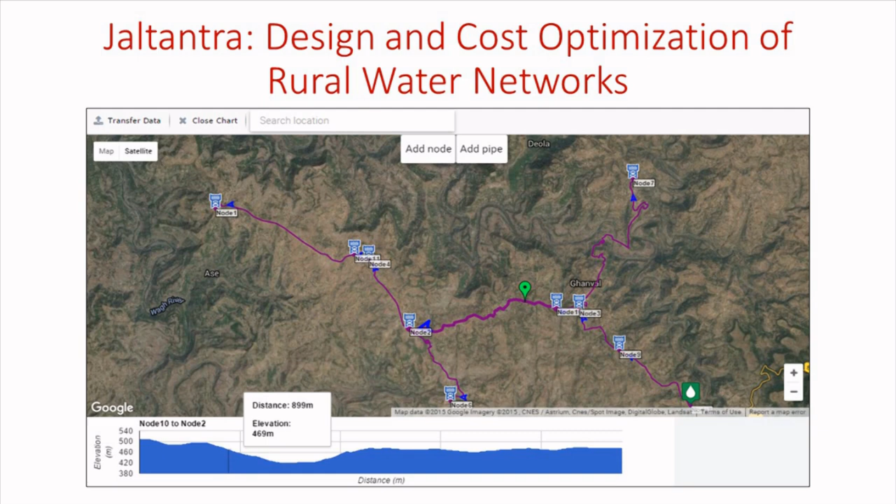The system has been optimized end to end, and also automated. These are two different things that I will talk about, so that a lot of the common errors that happen have been taken out. The important point is cost optimization, not optimization of some physical property or other. Physical properties come in the form of constraints, like the minimum head that should be provided. So it's not a research tool in that sense, but a tool to be used by engineers. We started working on this when NGO Disha Kendra approached CTARA that there's a drinking water crisis, and asked what can we do?

That's when the first TDSL project was started by Milind for this particular area, and since then we have taken a team of students and analyzed a large number of failed drinking water schemes in Thane and Raigad district.

Through that we understood this vicious cycle: once there is a technical problem in a system, the quality of service goes down. So some people stop paying, maybe people at the tail end getting bad service, and then they pull out. There's less revenue, leading to less maintenance, so further technical problems. And once some people don't pay, then others, even if they're getting good service, will not pay—they say others are not paying, why should I? So it's all the way downhill from here.

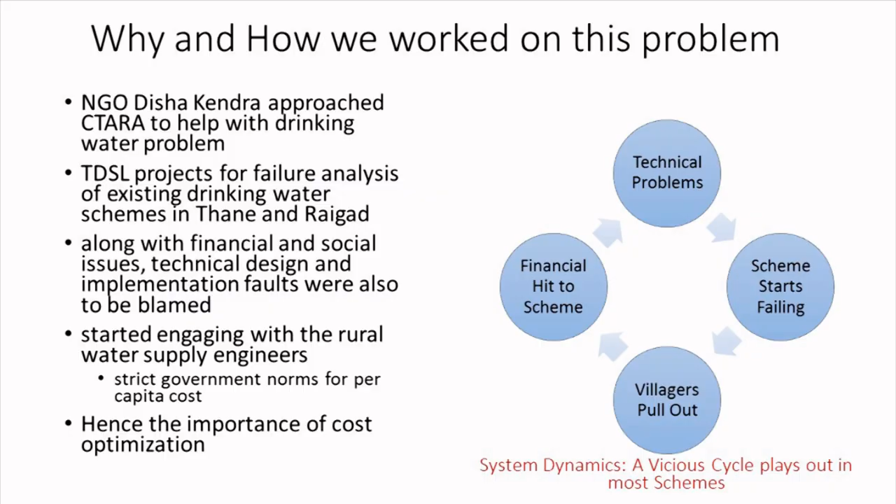So we started engaging with the rural water supply engineers, and one thing they said was there is a strict norm. Sometimes they design a scheme knowing it may have problems, but because of a strict per capita cost norm, they may cut corners to meet it, knowing well it may fail later, or not knowing, but it may lead to that failure. So the importance of cost optimization came—even 5%, 10%, whatever percent you optimize, it can make a scheme go from unviable to viable.

That's where our work started. And of course, the government has to follow a strict process, and sometimes those processes are frozen in time. But for them to adopt our system, we have to follow their process—we cannot say you are doing something wrong, at least not initially.

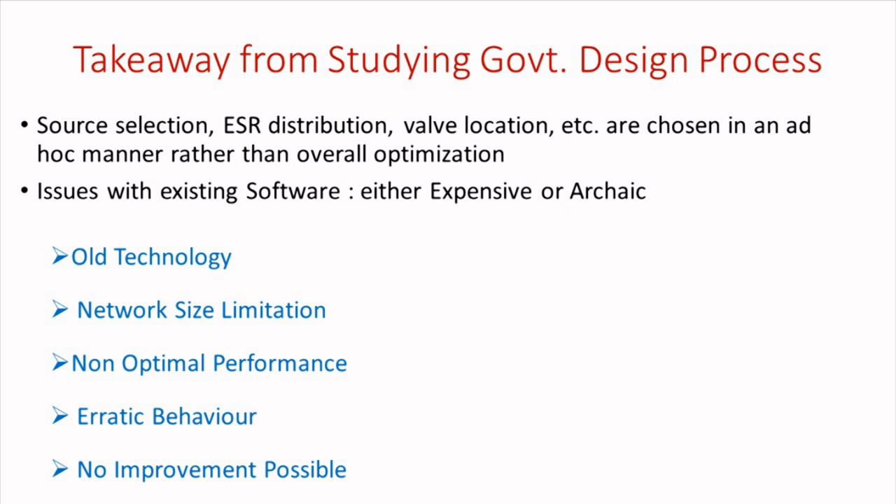So we studied the government process in great detail, understood which parts are ad hoc, and the limitations of their current design process. They were using old technology which could only work at small scale, giving non-optimal performance. So we decided we really need to build new modern software that will help both in design and optimization.

So the problem to be solved was cost optimization of a multi-village piped water scheme. There is a source in a river or a well where water is treated, then a main tank, MBR, where water is kept after treatment. From there it goes to various villages through an intermediate tank called an elevated storage reservoir, and from there to villages. This is the system we want to optimize, picking the right components.

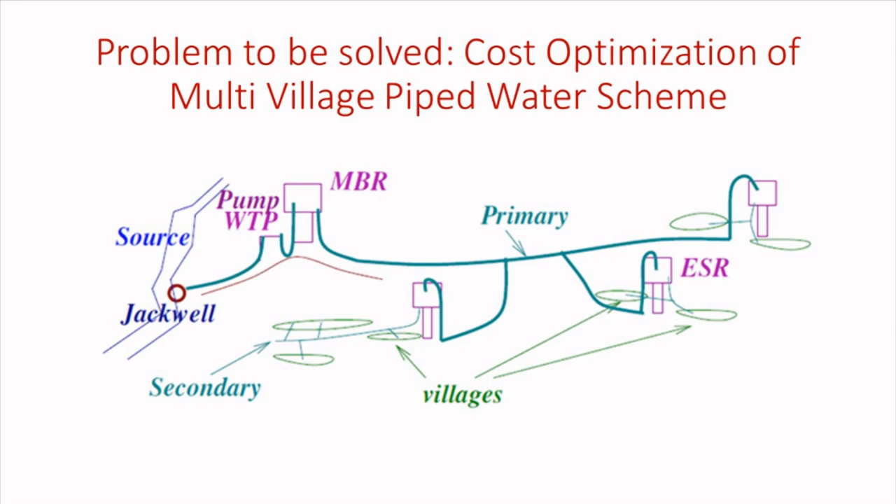So what is given to us? We assume the source is given, and that the WTP—water treatment—and MBR locations are out of scope of the JalTantra system as of now. The network layout, usually along the road, is also assumed fixed. And of course, the set of villages to be included for a particular problem—we can explore different combinations of villages.

Given this as input, there is still a lot left to optimize. The main component is pipe diameter, which constitutes about 50% of the cost—that's where traditionally they've been optimizing. Other things they have not optimized earlier, but now it's possible with JalTantra: where to locate the storage reservoir, what size it should be, which villages should connect to which reservoir—earlier done based on intuition and experience—and of course the pump size and the pump itself.

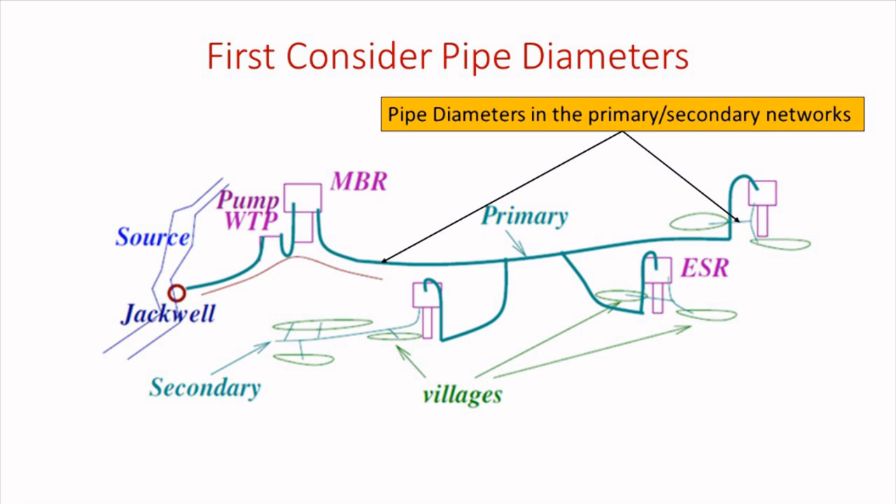So to solve this big problem, first we just focus on pipe diameter, because that was the only thing they were doing at the time—the rest of the components they were doing manually. So we said, okay, let's solve this problem.

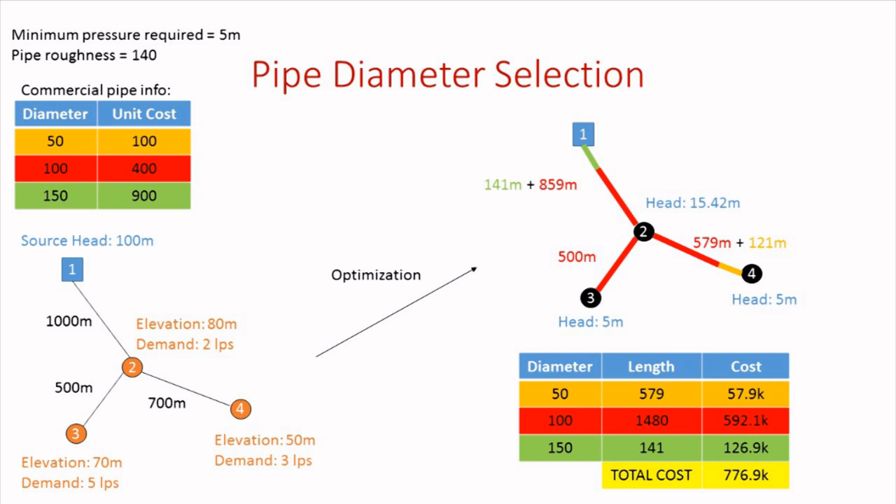The main idea here is that given a network, each link can consist of multiple pipe diameters. So you have optimization choices where each diameter's cost is known, and there's a minimum pressure required at each point. In general, a link can have multiple pipe diameters, and so through optimization you get an optimal cost.

Just a brief history: this has been studied over 30, 40 years, with hundreds of papers and hundreds of systems in some sense. Now, rural networks are typically branched because of sparsity—one village is far from another—whereas urban networks are looped because there is no real free space in urban networks, so every possible path you want to lay down a pipe.

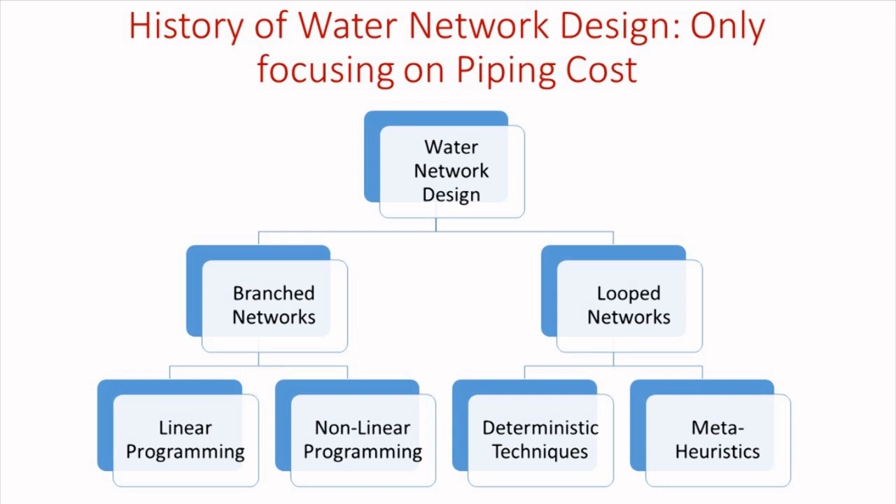So the focus of the work I present today is on branch network, but we are also working on loop network. There have been various paradigms, and because this optimal problem is essentially unsolvable even with today's resources, loop networks have been handled either with nature-inspired heuristics or other heuristics.

In all this work, the main point is that even after 30-40 years of research, they were only focused on the pipe diameter problem, and either they were heuristics for the general problem, or they assumed continuous diameter instead of discrete diameter, or they assumed that we will put only one diameter per link.

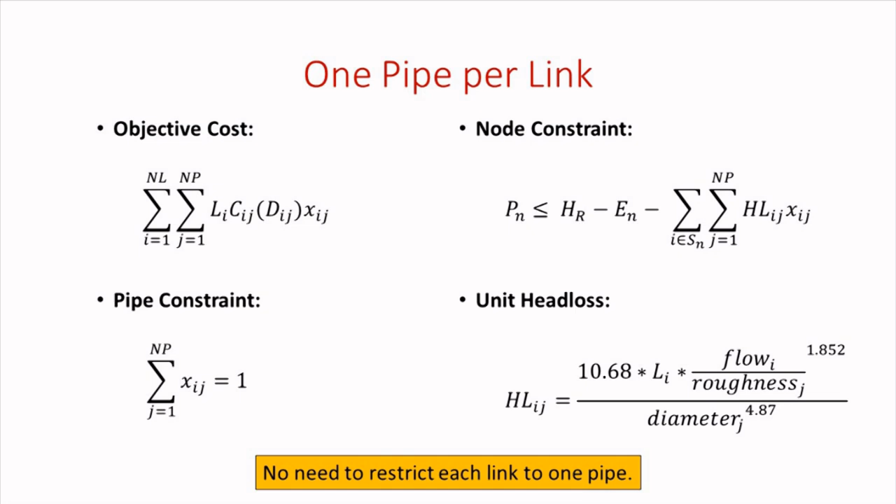There was a standard formulation being used at the time, but we realized that in practice there is no need to restrict each link to one pipe, and it's known that optimally, if the cost function is convex, there will be at most 2 pipes per link. So we modified this, but now we have an integer linear program instead of a linear program.

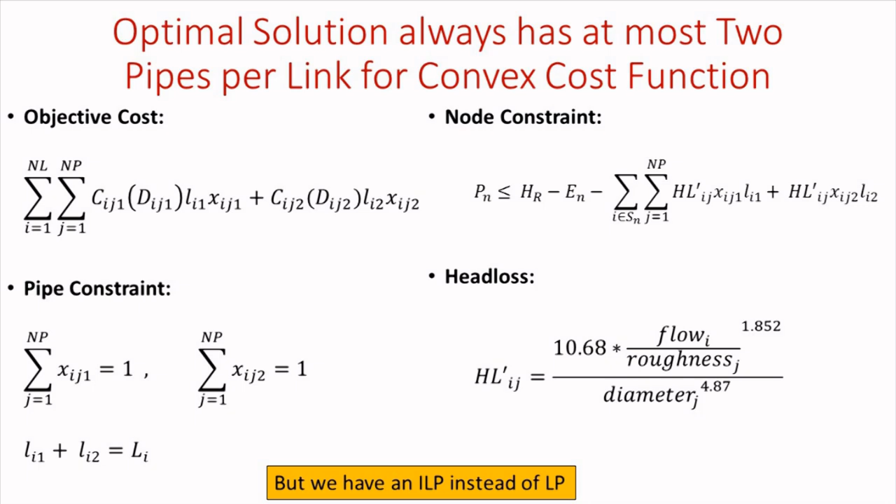So the runtime became really slow, and the system was taking just too long to run. So we thought harder, and we realized that in 30 years these LP solvers have come a long way, the CPUs are much faster, and there is a lot of memory.

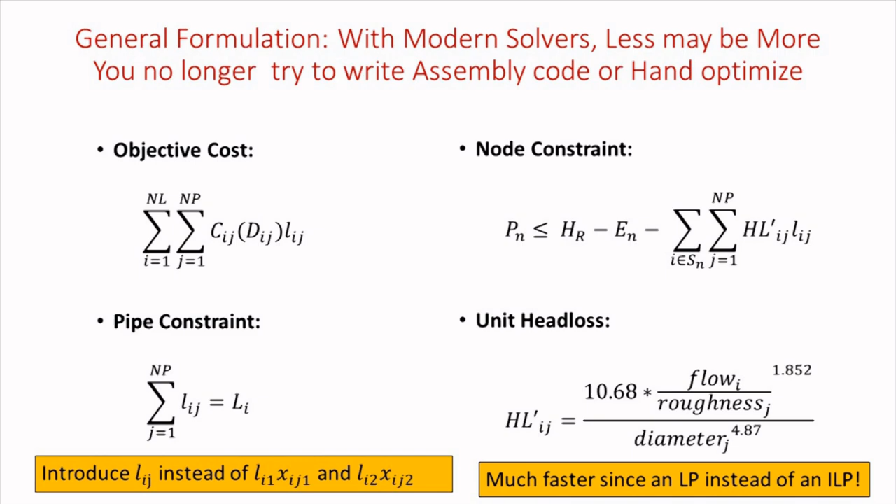Just the way you don't want to write assembly code yourself and instead let the compiler do the optimization rather than doing it yourself, similarly we said let the LP solver do the optimization that people were trying to do by hand. The important thing is to come up with a clear formulation that still makes it an LP.

So again, we iterated over various formulations and came up with something that was much faster. Anyway, these are just some details of how the earlier formulations were inefficient.

So this was the first version of JalTantra. It was a desktop system and was deployed. Engineers at Thane Water Supply started using it, and as we presented at various fora, the MJP is...

There is again rural and urban water department - MJP is the urban water department. So from Nagpur he got very interested and visited IIT just to interact with us. He came all the way from Nagpur, and then he got MJP Nagpur to start using it. They gave a lot of suggestions.

So that's the important point, that it was developed in partnership with government engineers, taking their feedback into account, because we could change the system as per their need. So they were also interested. Anyway, till now it was being used for small schemes.

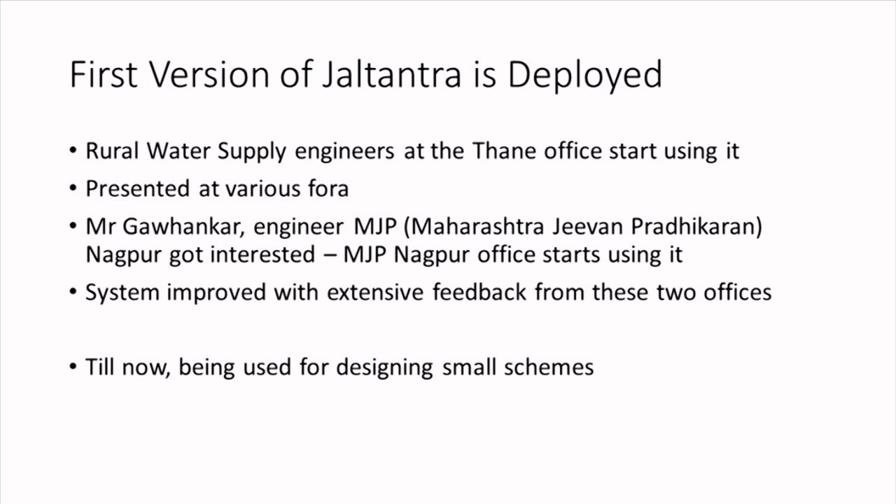When the NGO Kashtkari Sangatan approached us, there was a serious drinking water crisis in Mokhada Taluka - bulk of the Taluka was tanker-fed villages, and the government engineers said it's not really feasible to design this. This is the area from where all our drinking water comes.

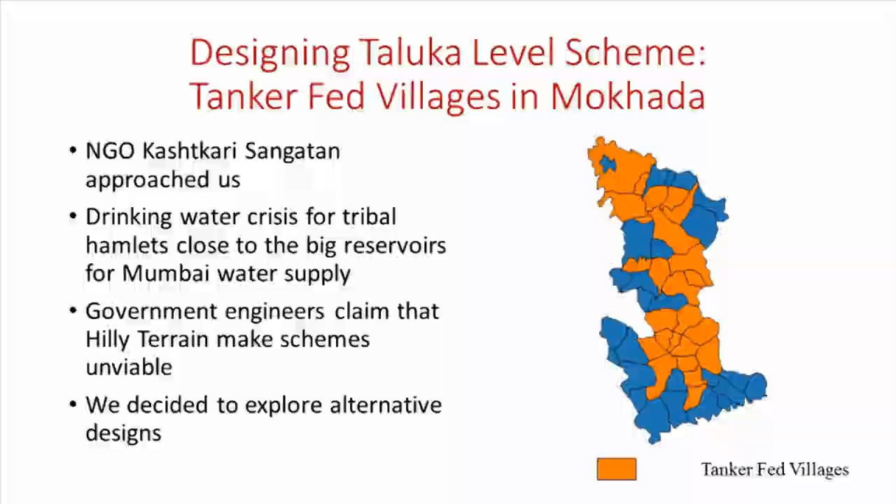So we explored some alternative designs, found that the design space indeed exists, but the main problem was that it was a very tedious task. Now in a large network, if you can decide where to put the tank, which village should be served by whom, what should be the pipe diameter - there is a huge combinatorial space explosion. There are 2 to the power m configurations possible.

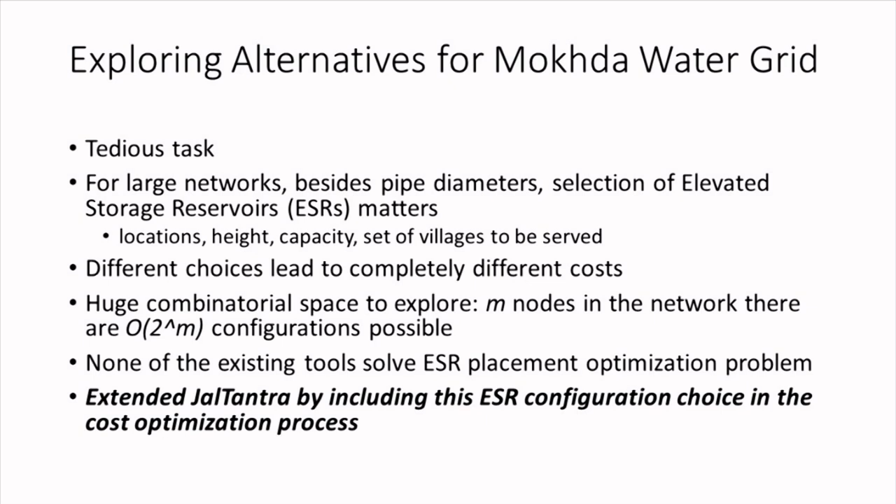We said, fine, we can't really do it manually. Of course we initially tried it manually, understood the process, because that's what the engineers were doing. Then we extended the JalTantra system with this ESR configuration choice. The main point here is that either you have a single ESR serving the whole network, or you can have multiple ESRs - in theory one at each demand node - and the optimal point will lie somewhere in between.

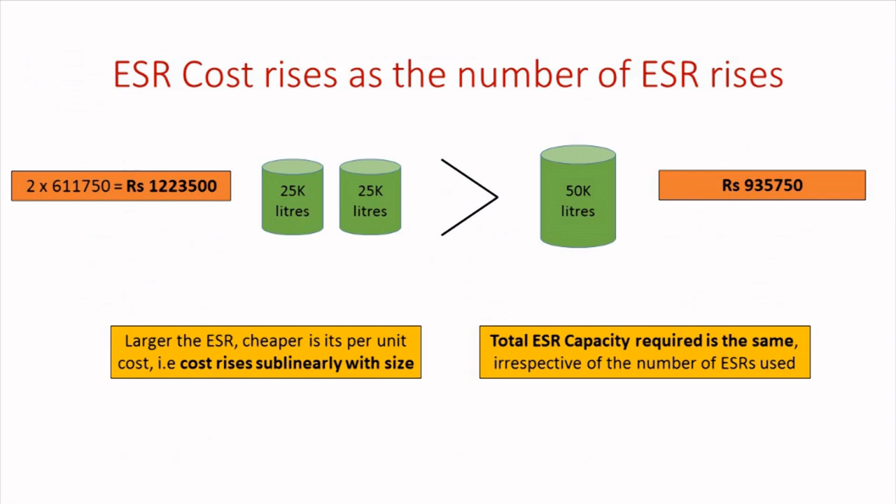So there are some details on why this optimization spectrum exists, because the pipe cost behaves one way and the tank cost behaves another way, and since they behave in 2 different ways, the optimal point will lie somewhere in between.

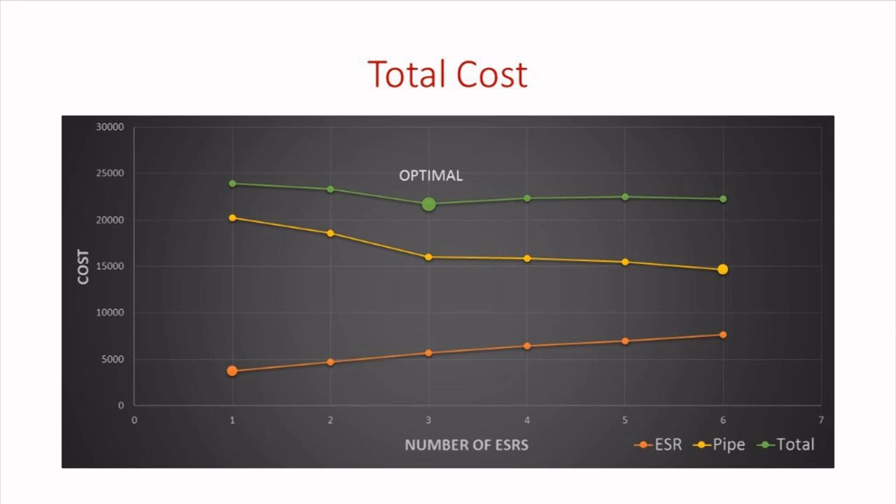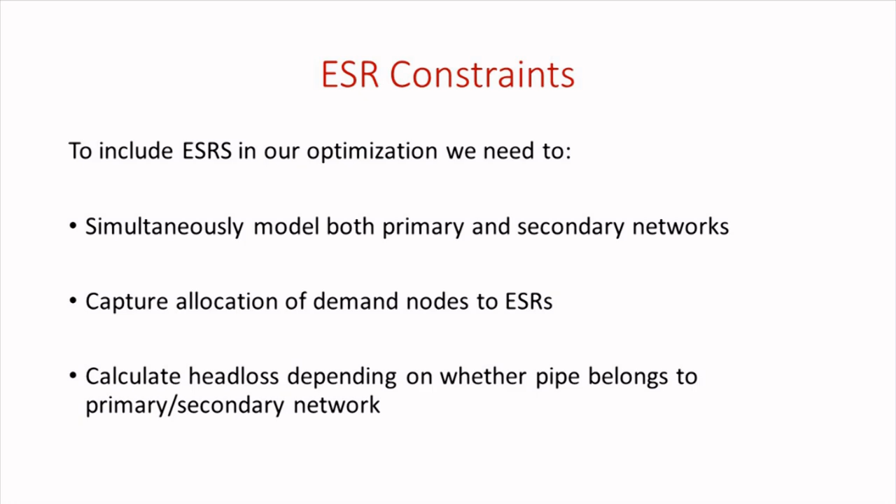So we decided to include this ESR in our optimization model. But what it really meant was now we have to optimize both primary and secondary - essentially each ESR breaks the network into 2 parts. The part from main tank to ESR is called the primary network, and the other is secondary. Till now they were optimized separately, and I guess the good reason was the combinatorial explosion.

So we simultaneously model both primary and secondary network, and these are some of the technical details of what it means. Finally, we designed one thing for the Mokhada grid with 30 villages and 13 tanks. The optimal cost comes somewhere between these 2 extremes.

Now the price for incorporating this ESR is, of course, a significant performance degradation, because again we moved back to an ILP instead of an LP. A 200-node network was now taking 24 hours, which was earlier only taking less than a second without this.

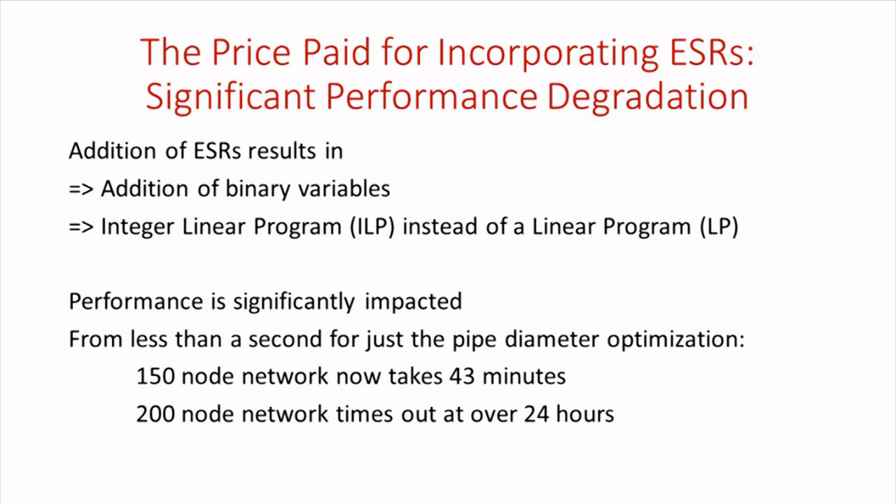So anyway, it took us a lot of time to again optimize our models. It also required interacting with engineers to understand - but it's not just mathematical optimization, it's saying physically what it means. Can I represent it like this?

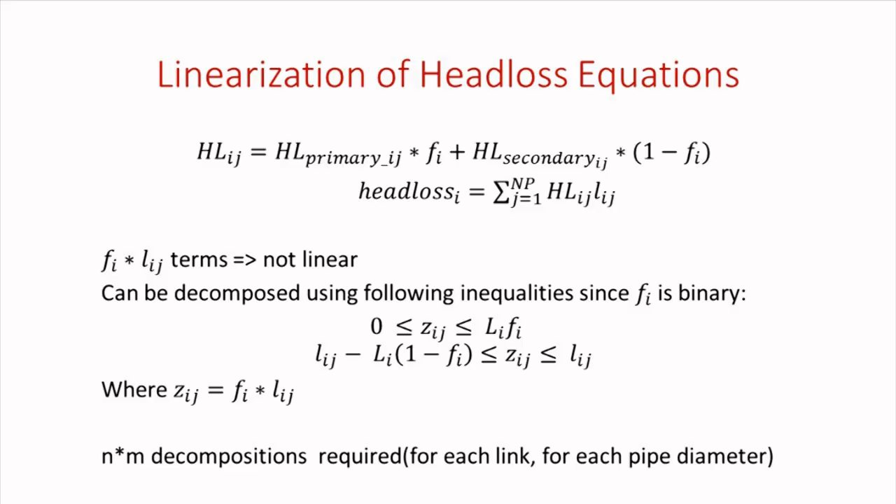Can this node really be served by that ESR or not? So that kind of interaction was needed, and then that translated into mathematical optimization.

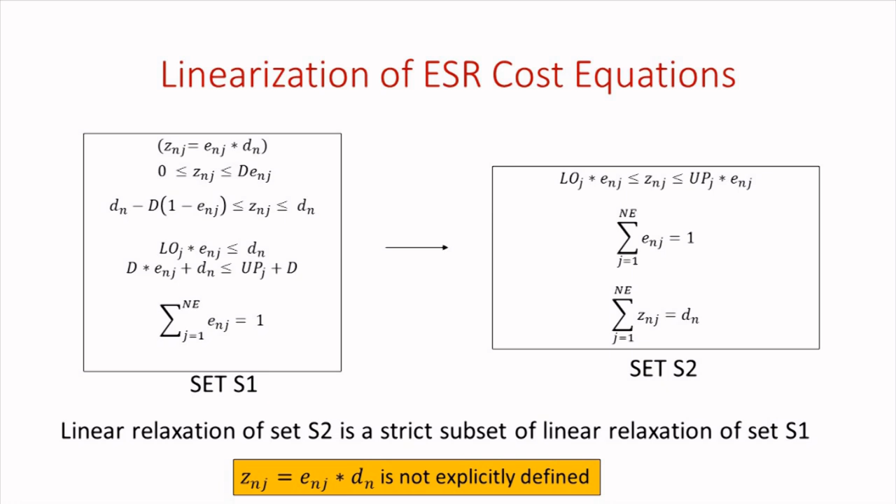A whole bunch of improvements were done, and of course we showed that mathematically they are optimal. When I change a set of equations, the linear relaxation of this is indeed a subset of this, so this is a strict improvement.

We did that, and finally after these optimizations it has come down to about 5 minutes for a 200 node network. This was many months of effort, and then further optimizations were done, and finally another order of magnitude improvement was obtained. So this is the model that's currently deployed, and this is the time it takes.

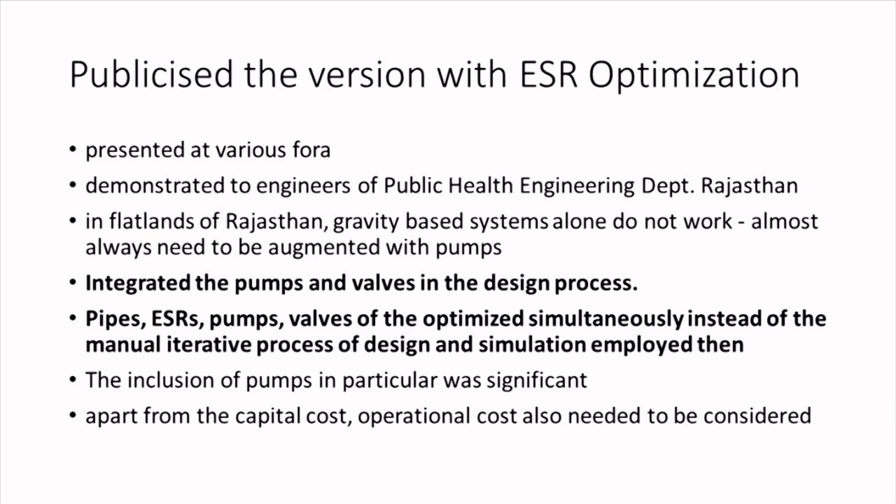We presented this in various fora, including to the Public Health Engineering Department, Rajasthan. And there they said, look, Maharashtra's gravity fed network works, but Rajasthan is plain and pumping is needed all the time. So we had to incorporate pumping into this.

The point is, pumping is of course helpful if the source is below the demand node. But even if the demand node is below the source, pumping can still help because the path is not a straight line—you may have to go down and then come back up. So even in such a situation, pumping can help.

So this is a model which is solvable without pumps, but the cost would be higher. If we can put some pumps, then the cost would be lower. Of course, for operational reasons, you may not want to put a pump because then you need an operator, you need a pumping schedule. So it may be okay to pay higher cost upfront. But the point is, now you have an option.

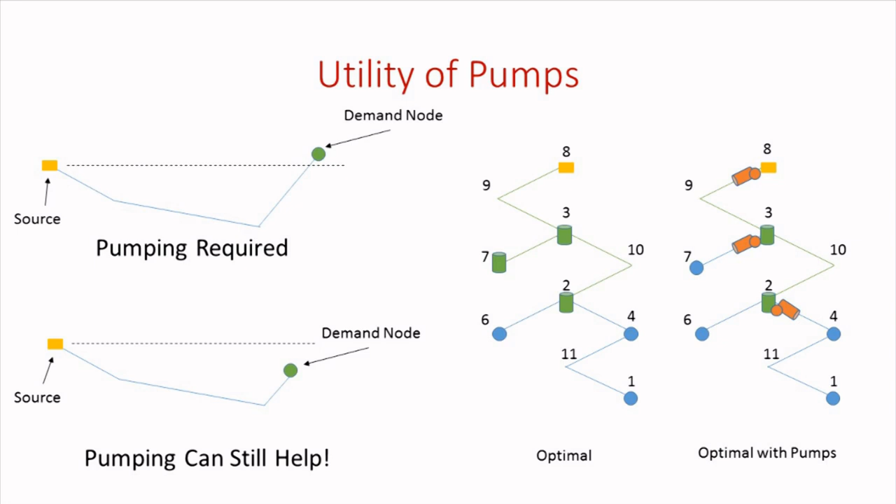And in Rajasthan, or in any plain lands, you don't have an option of not having the pumping. So all of that was done. We show that with pumping, the cost may come down further.

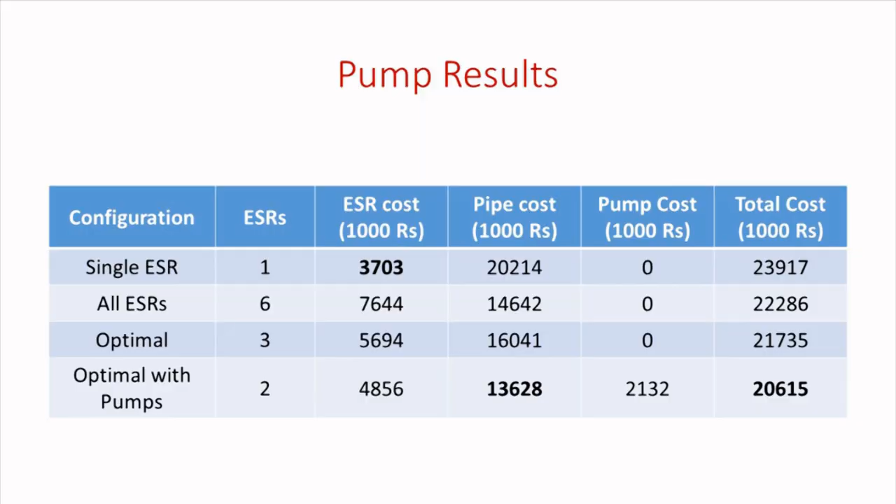We give all kinds of yes and no options—where a pump can be put, cannot be put, where an ESR can. So all possible configuration options are given to engineers so that their intuition and experience is not rejected. They may restrict this subspace, only explore this subspace, and from our intuition, or because land is not available or whatever, a lot of things can be ruled out.

That was important for the engineers to use the system, right? Our goal was that we should mimic their process, make it easy for them, never make anything hard for them, never deviate from what they were doing. So that was the important goal.

So we integrated this, and this is the current status. In various towns, with various rural water supply and urban water supply engineers, we have held several workshops. Based on their feedback, a lot of improvements have been made. Currently, we estimate more than 300 engineers are using JalTantra every day.

And now it's part of the official curriculum of water supply engineers at the Maharashtra Training and Research Academy. So every year, 100 more engineers in Maharashtra are being trained. And beyond Maharashtra, in Gujarat, Rajasthan, Haryana, Chhattisgarh, slowly engineers have started using it as they come and attend our QIP courses, CEP courses and other things.

As part of Unnat Maharashtra Abhiyan, a lot of state engineering colleges have been trained, and it's part of their curriculum in many places, and they have done design verification of local schemes. And in TDSC, the Technology Development Solution Cell, over 100 real life schemes have been analyzed.

I have personally visited with the students over 50 schemes. This was of course many years back, when we were trying to understand the space and other things.

So it's a work in progress, and we are now working on the loop network, making more and more feature improvements in the GIS system, disseminating to more and more places, and maybe extending to gas networks.